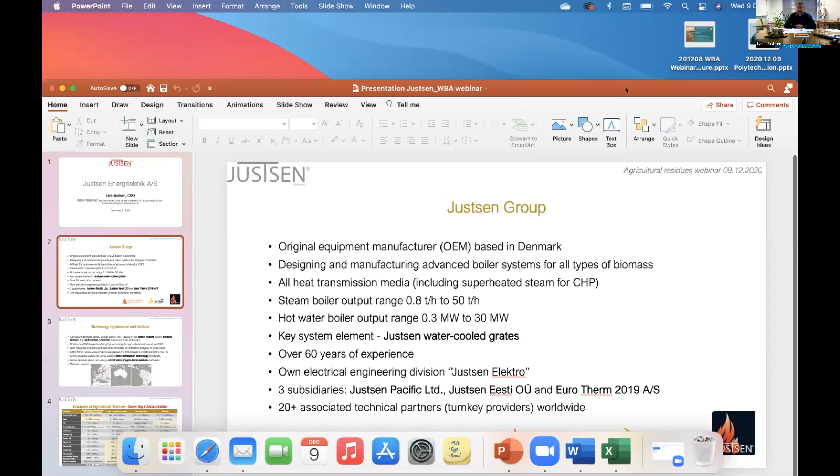We have a lot to cover. I have 8 to 10 minutes, so I will jump straight in. I won't spend so much time on doing the presentation of the company, people can read that in the slides. We have an agreement that when I raise my hand, I would like to change the slides. So please go ahead.

Justsen is a group of companies over the world. We are a so-called original equipment manufacturer, OEM, based in Denmark. We have, as you rightly say, 30 years of experience with large boiler plants, but in total we have more than 60 years experience with biomass boiler plants. We celebrated our 60 years anniversary last year together with technical partners from all over the world. We are working as an OEM, but through these technical partners and our own 3 subsidiaries in Australia, Estonia, and Denmark, we can offer turnkey solutions to end users worldwide. Please switch to the next one. Here we have a slide showing where we are represented at the moment.

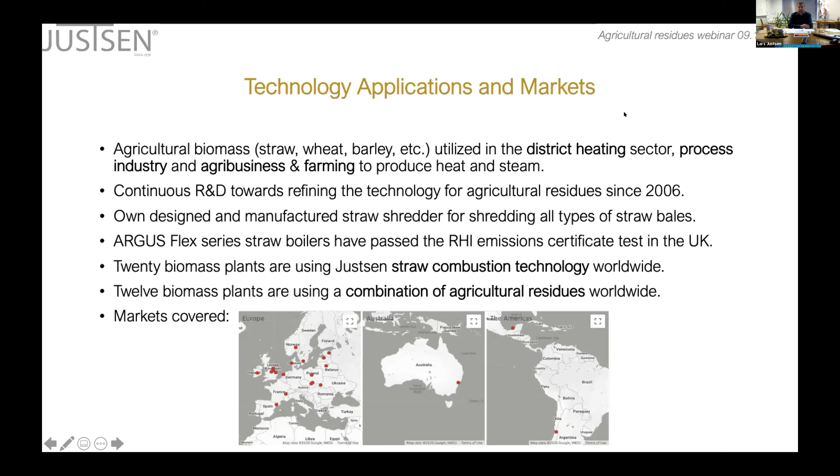We have three slides and we have decided to provide an overview of the characteristics of some representative agricultural residues, compared with wood chips from virgin wood to see where the agricultural residues mainly differ. On the next slides we will show some of the challenges, and then some of the solutions that biomass boiler providers use when combusting agricultural residues.

First, the key characteristics. There are four columns on this slide. The first shows virgin wood biomass, and what's marked in yellow is the challenge we see. The good thing about wood is that carbon, hydrogen, and oxygen together make up about 99% of the dry matter in that biomass, so it's very easy to handle. I'm not going to talk about wood, it's there for comparative purposes. Instead, I'm going to talk about straw, crude olive cake, and rice husk.

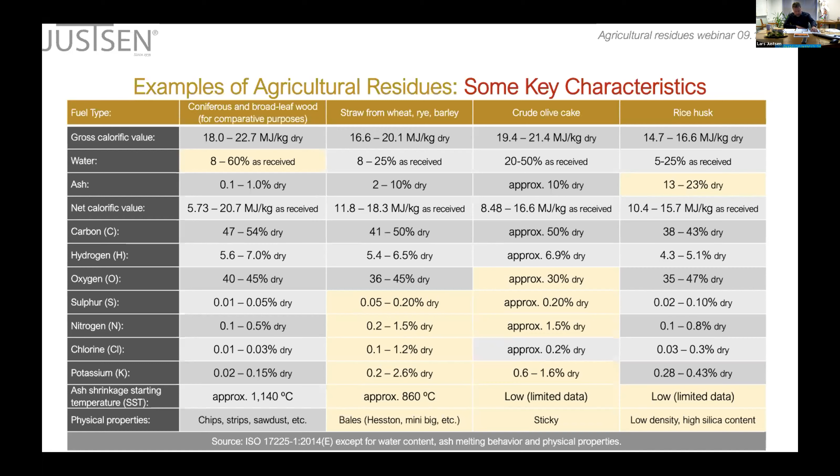So I'm ready for the next slide to go more into detail with the challenges. Here you can see the fields marked in yellow on the previous slide, and we explain a little bit what the challenges are. Let's forget about wood for now and focus on the agricultural residues.

With straw, the medium to high sulfur content results in SOx emissions, but also corrosion issues inside the boiler. Nitrogen is also quite high, although not as high as contaminated wood wastes like chipboard and MDF. It has, as the only one of these, a high chlorine content, which results in hydrogen chloride and dioxin emissions, and also corrosion issues.

That is true for many agricultural residues. It's high in potassium, which is used as a fertilizer, and when combusting, a percentage of that potassium becomes K2O, which is quite sticky at low temperatures. That creates fouling issues inside the boilers. Straw also has a low ash melting point, so there can be slagging and clinkering on the grate, which again creates some fouling issues.

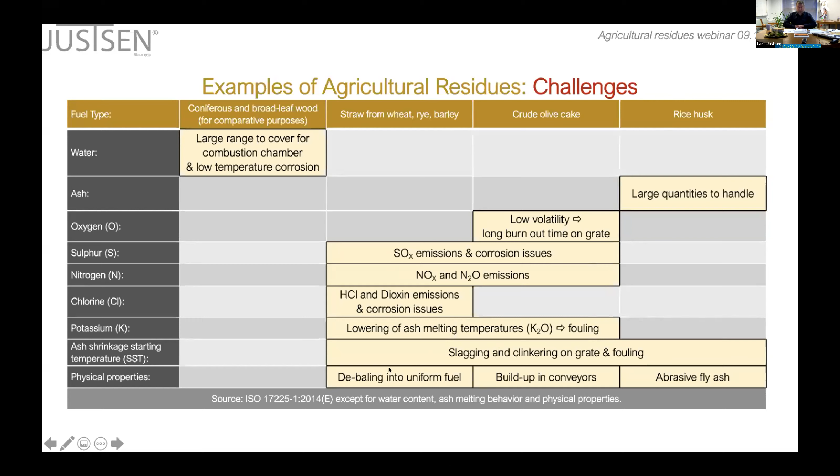Let's move on to the solutions.

If we, instead of going by fuel, go by the rows, we'll start with ash. The ash content of straw and crude olive cake is quite high compared to wood at least, but for rice husk it's extremely high, and that's why you need special conveyor systems. A fifth of what goes into the boiler comes out as ash because of this high silica content. When it comes to the low volatility of the olive cake, you need this rectangular grate.

When it comes to sulfur emissions, sometimes lime injections are used. Around the world there are different levels of SOx emission allowed. On the EU directive that came out in 2014, a limit was set for 300 milligrams and 200 milligrams, depending on the size of the boiler. And that is marginal for sulfur dioxide emissions, so in some cases you would need to use lime injections. I will get back to that on my last slide.

The nitrogen content results in NOx emissions, as we saw, and there are different ways of controlling that. First of all, you need to avoid creating the nitrogen oxides. When it comes to biomass, all the nitrogen in the flue gases will come from the nitrogen in the fuel and not the nitrogen in the air. So it is fuel-derived NOx that we are looking at most. Good boiler design with staging of the combustion air can ensure that you are not creating a lot of it, but you can also employ, depending on your construction, SNCR or SCR systems to inject urea or ammonia into the flue gas stream and keep the level down.

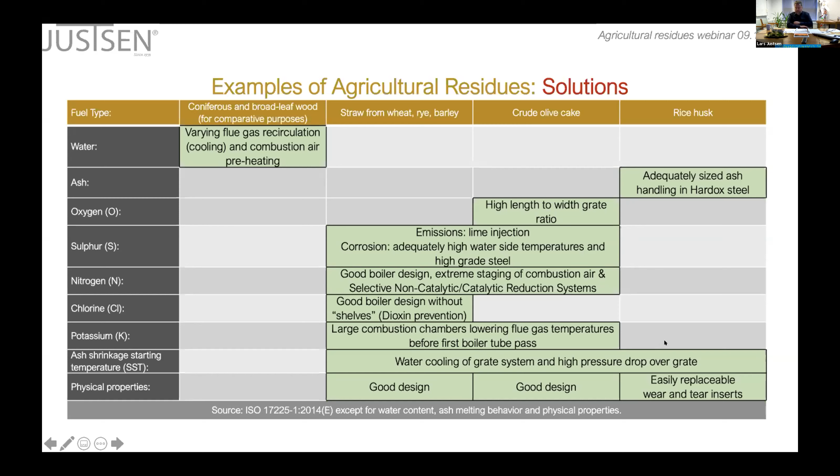I'm ready for the next slide and I will try and speed up.

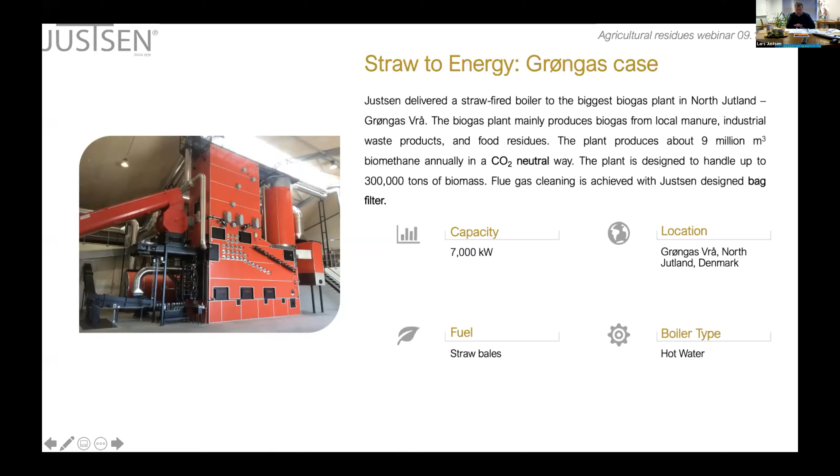Quickly going through this slide, Grøngas is a customer of ours in Denmark. It's built as a straw combustion plant and has been in operation for 3 years. The straw harvest in Denmark 3 years ago was not of a quality good enough as fuel. Therefore, they actually switched there to crude olive cake on that boiler, and we have learned a lot from that to deal with the high sulfur and with the stickiness of this fuel. And I'm ready to move on to the last slide.

This is a newly developed boiler system that we have made, and you can see on the slide here that we have employed some of the things I've been talking about earlier. First of all, you have the water-cooled grate that is fully integrated with the rest of the water system inside the boiler. In the ignition zone, we have stainless steel reinforcements to make sure that the activated chlorides and sulfur

is not going to cause corrosion. We have vertical passes, and on the third pass marked there, it's a chamber for employing an SNCR system because it needs the right temperature window in order to reduce the NOx emissions. Then where it's pink all the way through inside the pressure drum, we have empty passes with good space. We have discharge augers, so we don't have fly ash lying on shelves inside the boiler to prevent dioxin creation.

Then it goes through the pressure drum and through the economizer, which would be modulating. And when it's modulating, we can actually control the flue gas temperature to hit the sweet spot of the lime injection after the boiler system and before the bag filter.

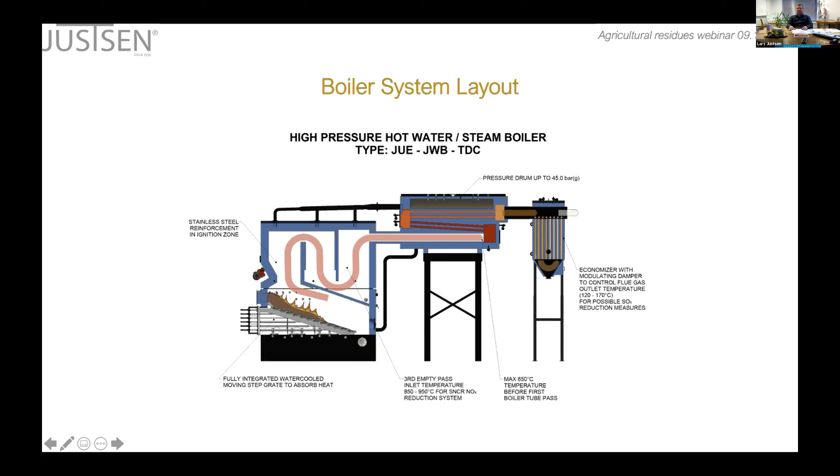Thank you very much, Lars. That was very good to start with, so that you gave kind of a generic view on the issues and the challenges, and I think that was very useful for the rest of our presenters who will not need to go into these generic issues. And now I'm very happy to introduce Hong Hao to you. Hong has been the vice president of World Bioenergy Association, and he is also the chairman of Great Resources New Energy, a company that is realizing a significant number of projects using agricultural residues as fuel in China. Hong Hao, the floor is yours.

Okay, thank you. Things we all know. By September 22, our President Xi announced that China has a target that by the year 2030 we will reach peak emission, and by the year 2060 we will reach carbon neutral.

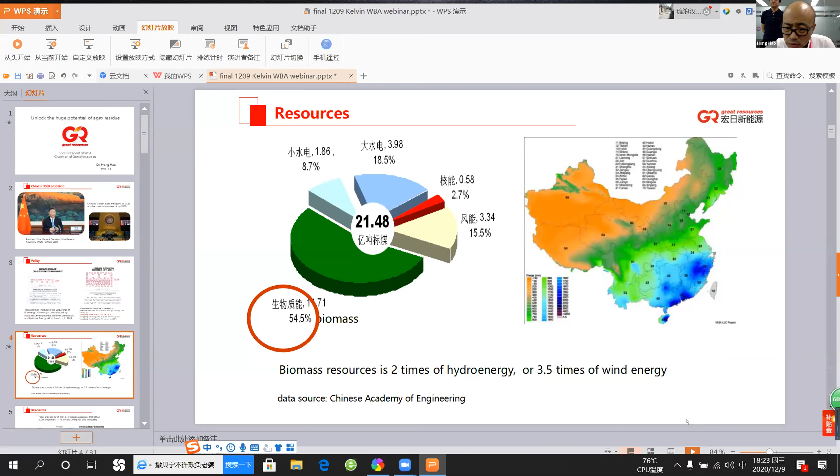Sorry, how would you like to share your screen with us? Yes. Okay, very good. Okay, yes, just do the full screen mode, and then we're good to go.

Okay, thank you. This is the resources we have in biomass energy. Our biomass resources are as much as 2 times compared with hydroenergy, and also 3.5 times wind energy. That means our biomass energy is the number one renewable energy resource.

And the important issue is, look at the right: our biomass energy is located on the eastern side of China, where 75% of people live, as compared with solar and wind energy, which is located on the western side, where only 25% of people live. So biomass energy resources align with our energy consumption.

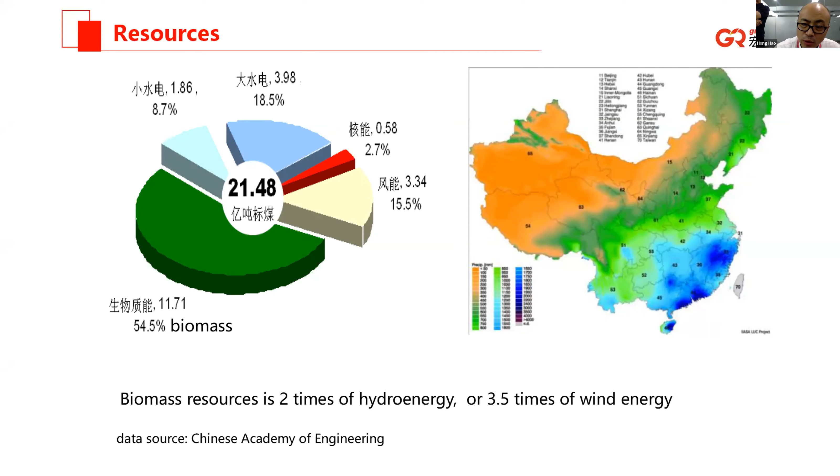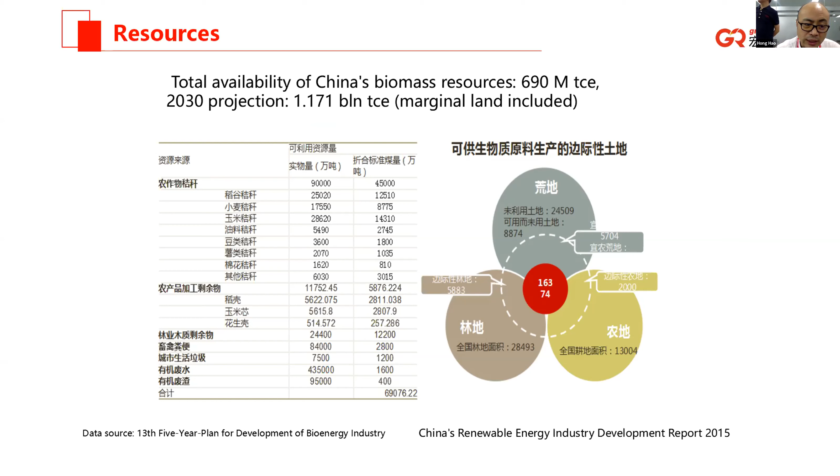And we also have enough biomass resources, including forest residues, agricultural residues, and other organic resources. This is the forest residues we have in whole China, and this is the different kinds of agricultural resources in whole China.

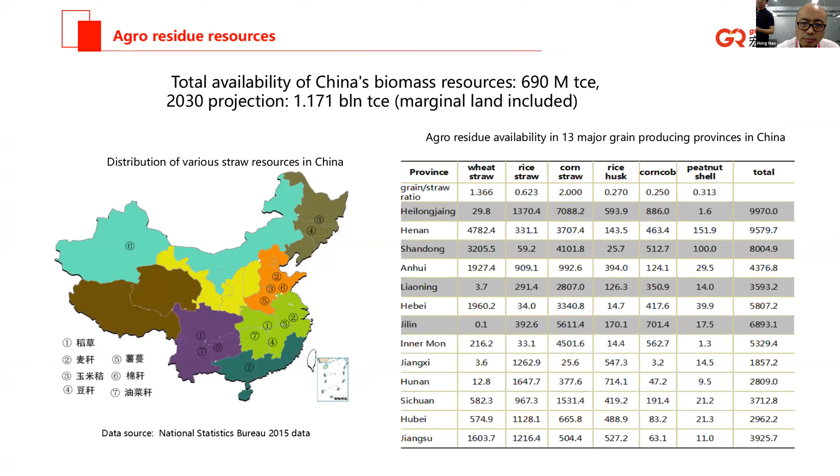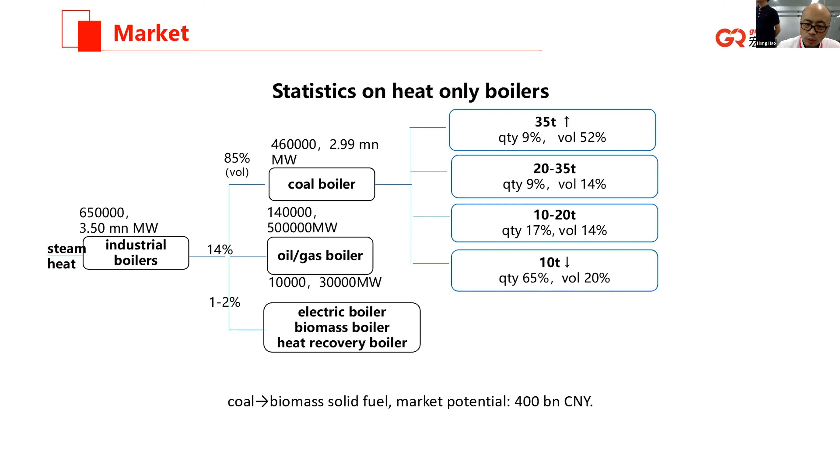And this is the market: we have 650,000 boilers in whole China to produce heat, and right now 85% of these boilers still are coal boilers that use coal. Only 1 to 2% of the boilers are based on biomass. So we still have a lot of potential market.

As we're talking about the market, first we need to analyze the industries that use heating. Number one is chemical in China; the chemical industry uses as much as 34% of the heating in whole China.

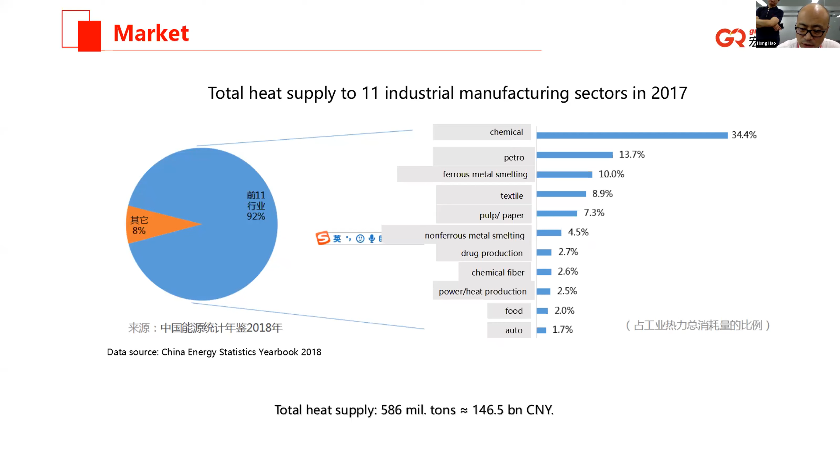Number two is petroleum. As we calculated this, I think this figure could not capture the whole China energy consumption of heating, but some of them amount to as much as 586 million tons of coal equivalent, that is 146 billion yuan every year. So this market is big enough.

And this is industry heating. Another heating market is urbanization. In China, we have more than 1% urbanization growth every year for the past 10 years, so building heating demand is very high.

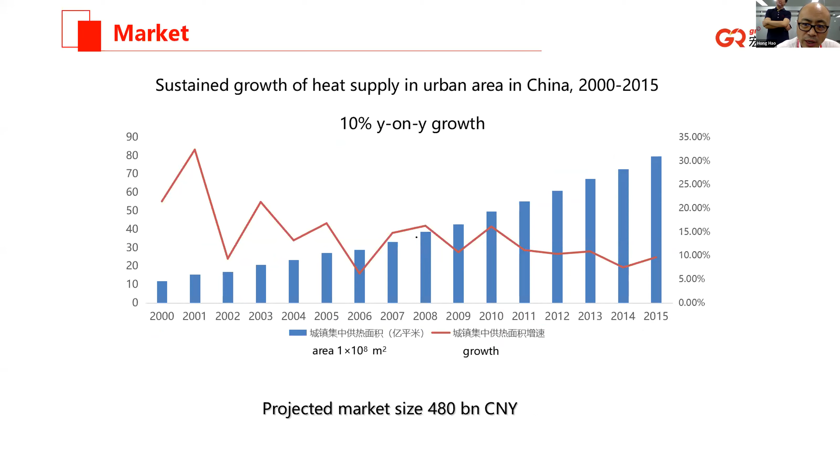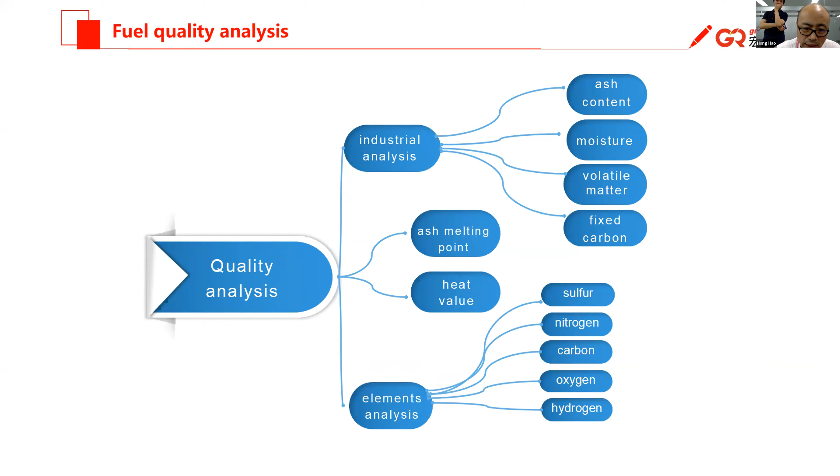As we analyze, first we have to think about the quality analysis when talking about using biomass energy. That includes industrial analysis, ash melt, heat value, and element analysis. And we have set up a quality analysis laboratory 5 years before.

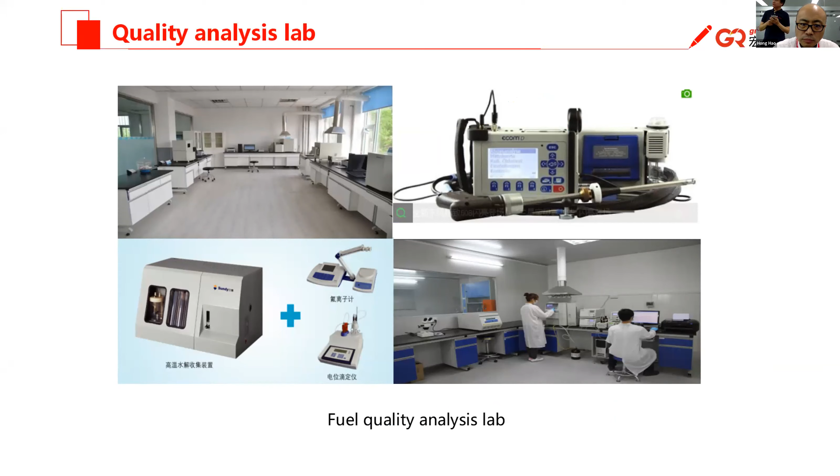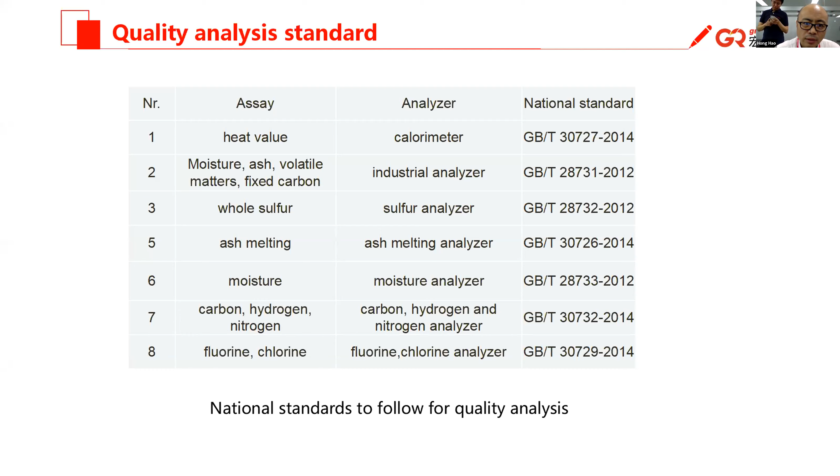We also have some standard national standards to do the quality analysis. This is the result when we're talking about the pellets, including wood pellets and straw pellets, especially corn straw pellets, and also rice husk and peanut shell pellets. These are the top 5 we use in Northeast China.

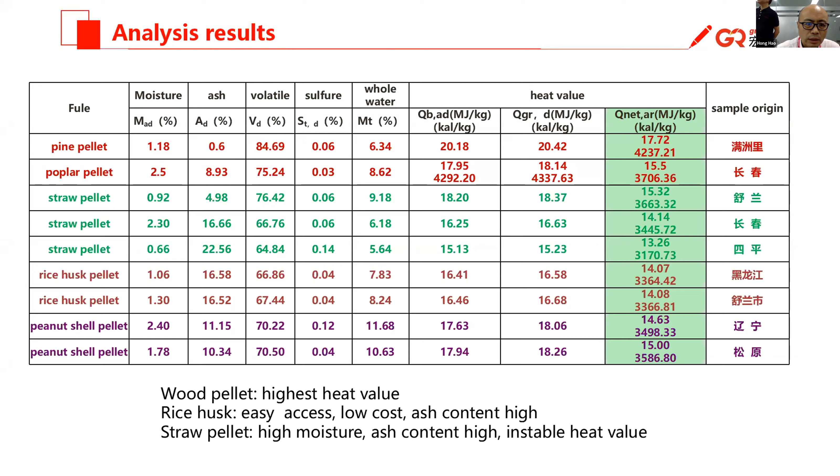These are the chemical elements of agricultural residues. And these are 3 challenges: one is fouling, another is slagging, the third is corrosion. So when we're talking about agricultural residues, when we use them, we have to face these 3 challenges.

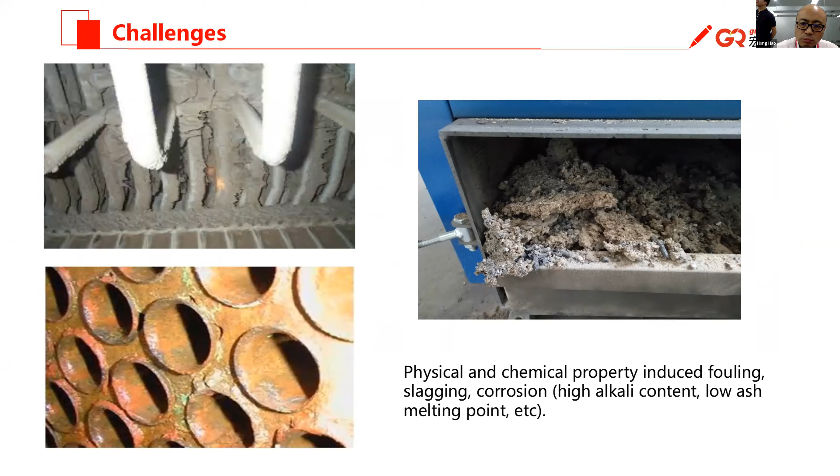Another challenge is the cost. Based on our experience, straw pellets are nearly equal to coal consumption cost-wise. Wood pellets are a little bit higher compared with straw pellets. That's the reason we are trying to use agricultural waste to make pellets, because that's the cheapest choice for us.

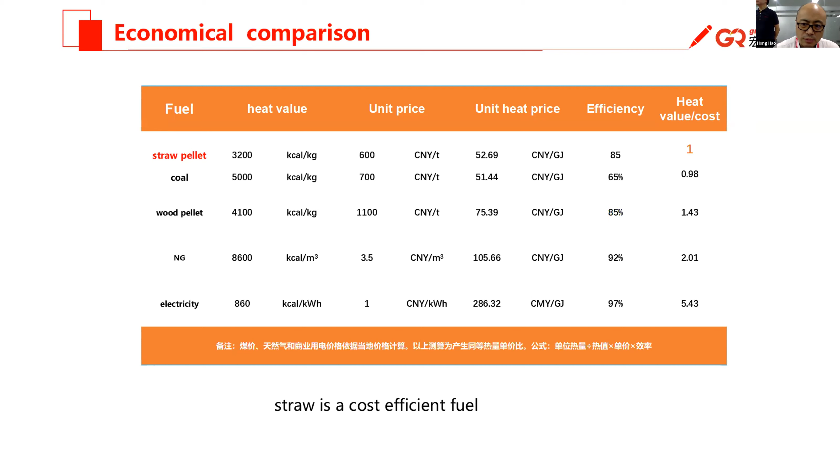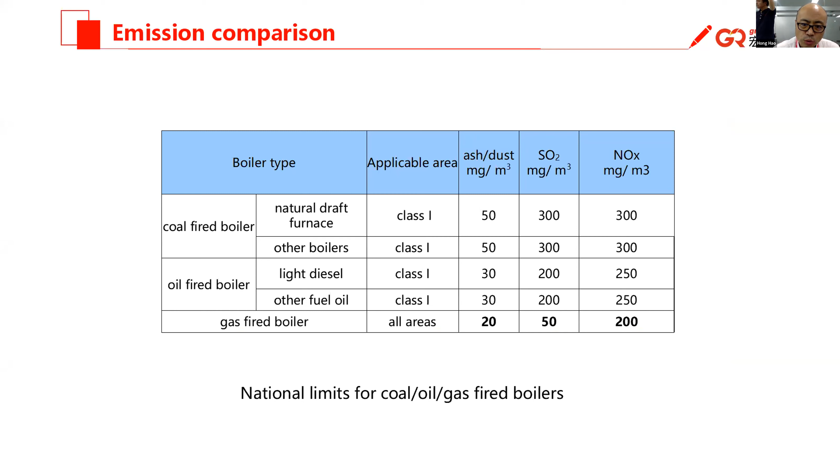And the emission - there are 3 types: coal-fired boiler, oil-fired boiler, and gas-fired boiler. We have to compare our biomass boiler to meet the emission demand. Right now we don't have a national emission standard in whole China, but in some provinces, for example Jilin province, we have our own standard of emission for biomass boilers.

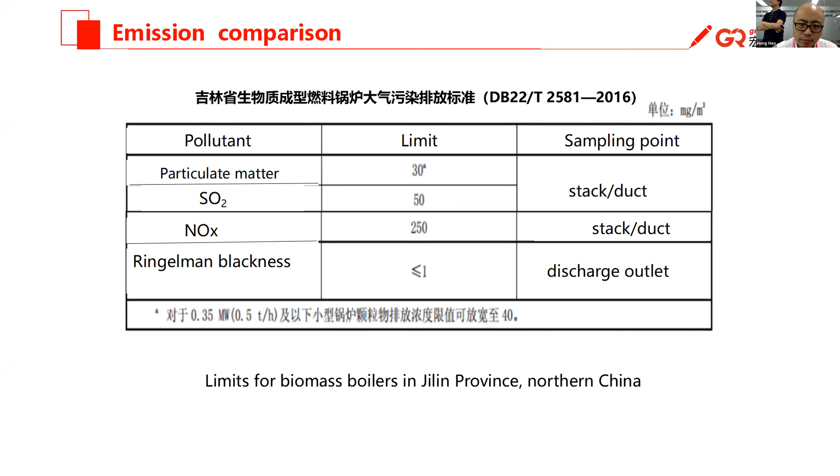During the past 15 years, since we set up grid resources by year 2006, we have set up a value chain from resources to plant service. And this is our business model.

One is BOO. That means we invest in a heating plant to supply heat to our customers, and we buy pellets from the resource owners, and we give our technology to make pellets, and we use their pellets for heating supply to our customers.

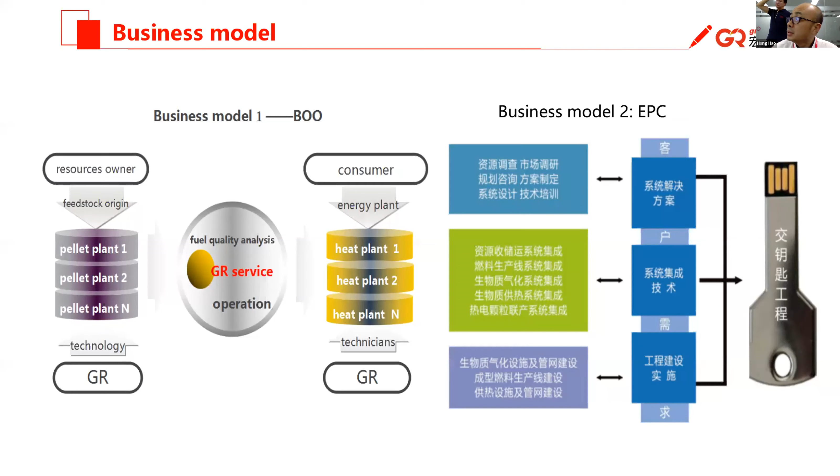Another business model is EPC, where we do everything to service our company. And now we have so many customers, and at least five of them are top 500 enterprises of the world.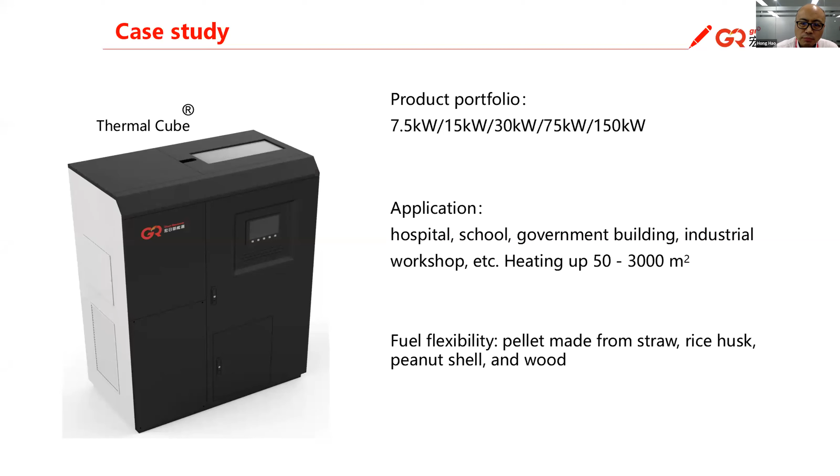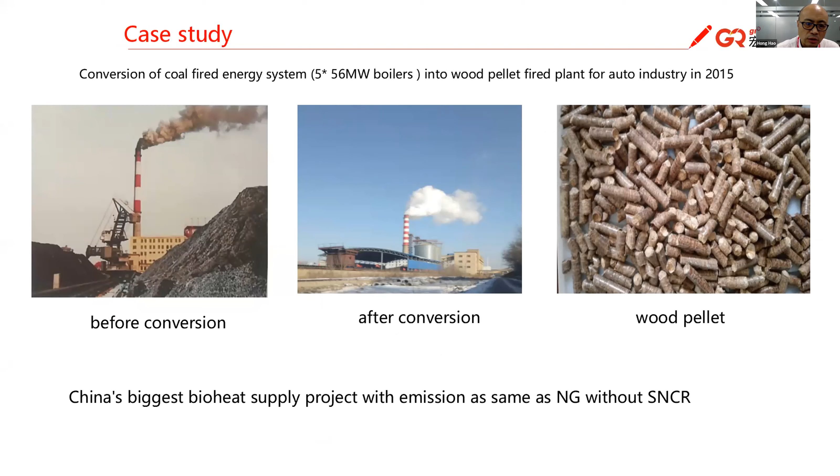And this is the biggest plant that we have already used. Each boiler is 56 megawatts, and we have transferred 5 of these boilers from coal fire to pellet fire, and it's running from year 2015 to now.

This is another case study, where we use rice husk pellets starting from year 2017. That is a university zone where we supply heat to 10 universities, as much as 1.2 million square meters.

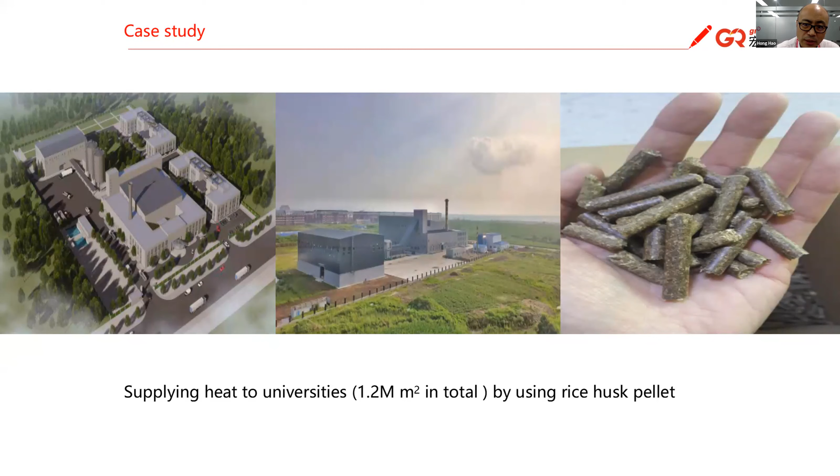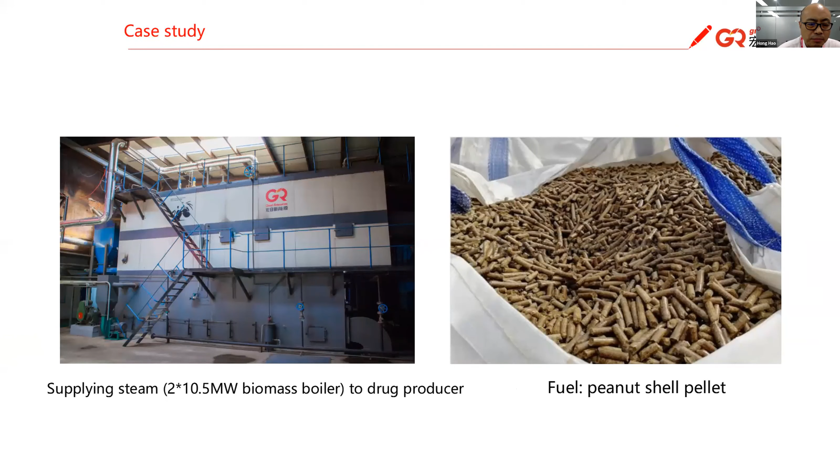And this is another case where we use peanut shell pellets to supply bio-steam to our customers.

And this is a CHP plant where we use corn straw directly to produce heat, to produce electricity, and to produce fertilizers as well.

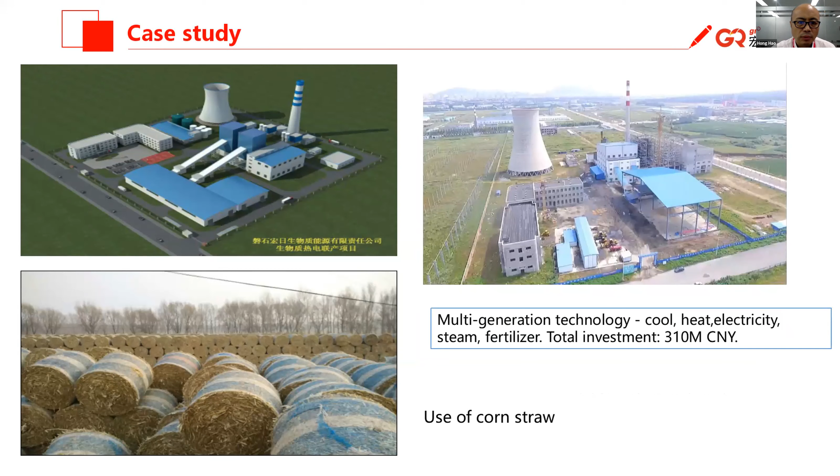And this is another case that just finished early this year. It used wood chips to produce steam.

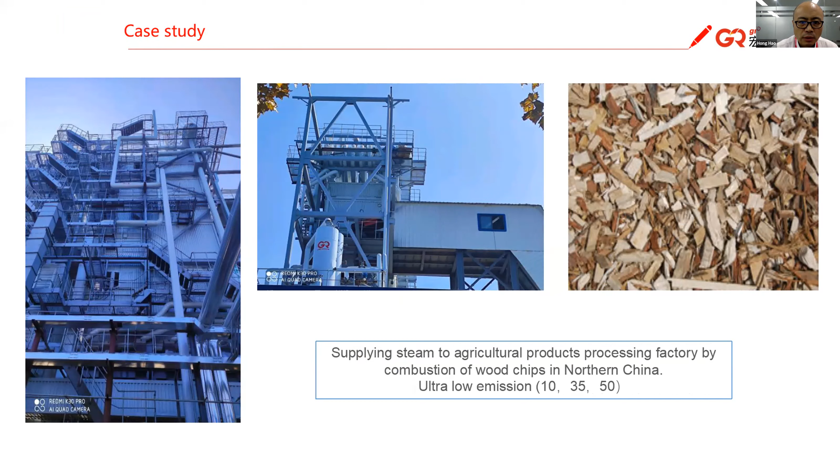And this is another case where we use briquettes of corn straw, also using hot air to dry the corn. That means we use the straw of corn to dry the corn.

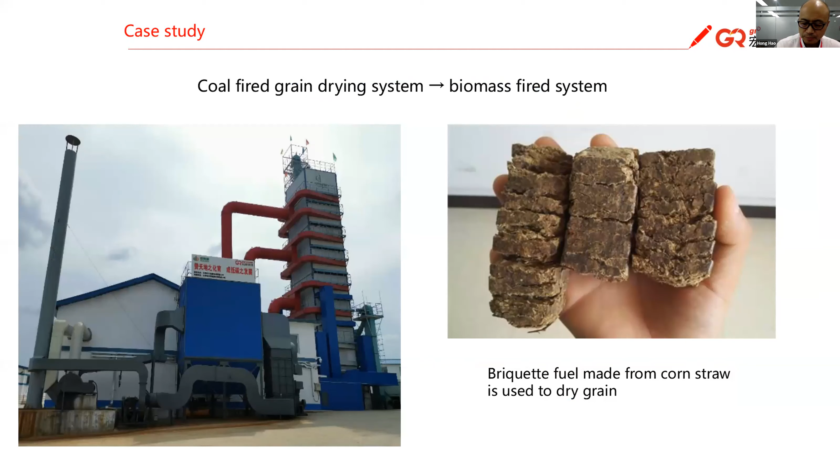So now we have our plan to try to use bioheating to supply carbon neutral towns, carbon neutral industry zones, carbon neutral cities. This is our target. But right now we are trying to use any advanced technology to reach that target, not just in Jilin province, but in the whole of China.

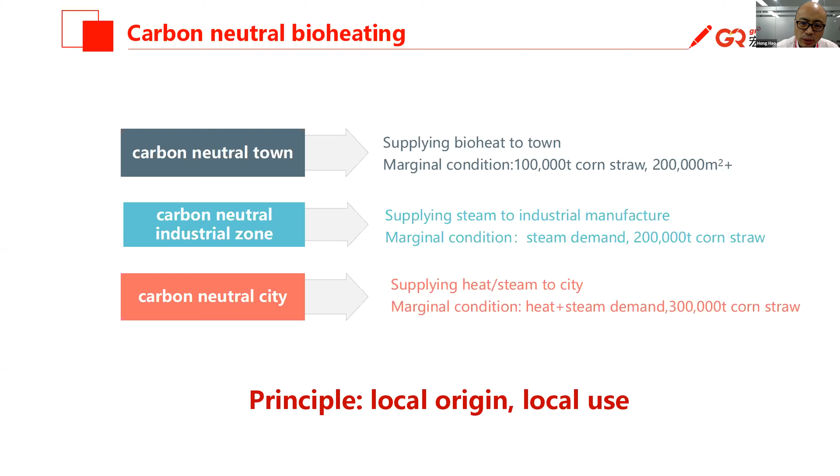This is the year we are trying to do the planning for the next 5 years, and we want to use most of our resources based on agricultural residues, because in China, the #1 resource should be agricultural resource. And based on our more than 10 years of experience, we can use it smoothly. So that is my report. Thank you very much.

Thank you very much, Hong Hao. This was really amazing what you're accomplishing, and the way that you're growing the use of agricultural residues.

There has been a question in the audience, a question that I also had - initially I was really surprised to hear you mentioning that using pellets from straw are actually competitive with coal. The question from the audience, from Jean-Marc Jossart from Bioenergy Europe, was: would it be straw from wheat or from corn?

From corn, not wheat, because in Northeast China we only have corn. But I think for wheat that should be similar.

Is it indeed possible to realize a conversion from coal to pellets without a subsidy, or what would be the incentive? What would be the incentive for a coal-fired boiler to be converted? How are policymakers going to introduce this change from coal to agricultural residues?

First, for the policies, a coal boiler could not be used if the capacity is lower than 14 megawatt. So every coal boiler with a capacity lower than that should be shut down. So that's the chance for us to do this.

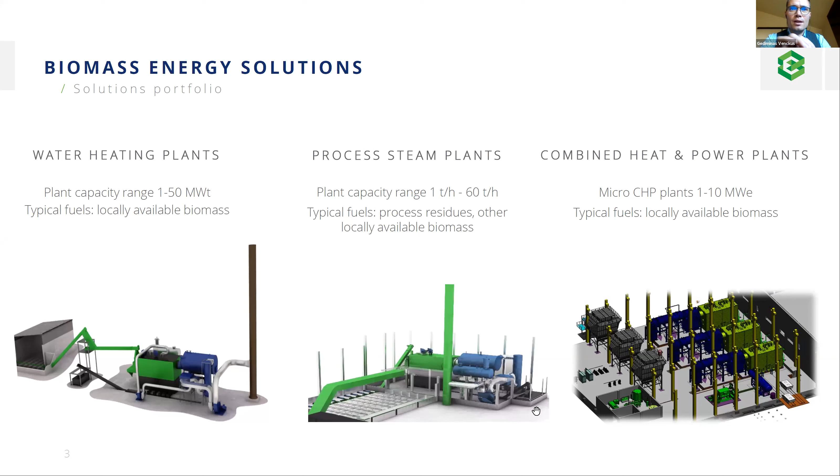Just to illustrate a couple of examples of our projects - I'm not going into very deep technical detail here, primarily because of confidentiality restrictions we have from the customer side. They do enjoy those investments and it brings certain competitive advantage, so in many cases, unfortunately, we're not allowed to disclose the types of solutions and what has been implemented. But this gives you a very broad overview and examples of what kind of industries are running our plants.

However, there are some challenges with getting rid of that material. So what happens here is they burn it and produce process steam. The flow of biomass, however, in this plant is not enough to fully cover the steam demand of the plant, so they mix in some waste wood also to complement the availability of biomass needed for steam supply.

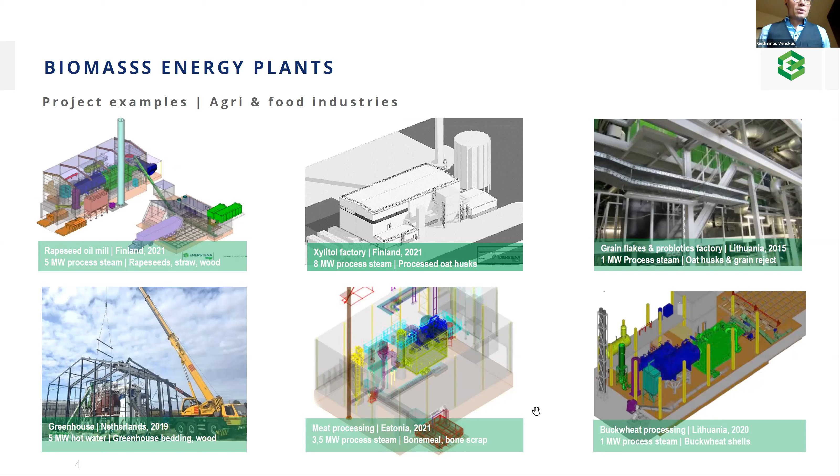Now about the potential that agri-biomass residues bring to the stakeholders. There's absolutely untapped potential, huge potential of agricultural fuels, and we believe it very much. The key message from a technical perspective is that yes, the technology is there - the industry has technology solutions for all of those fuels. What we'd like to see is more encouragement from those stakeholders to move forward in that direction. By doing this, they will recognize a handful of values - biomass waste to energy enables several valuable aspects: energy independence. If you can disconnect from your gas pipeline, coal, or heavy fuel oil, and produce your energy from your own side streams, this is really wonderful. In terms of supply and cost, you become independent, your product becomes more competitive, and you get a sustainable business.

You're no longer dependent on imported fuels, right? There is circular economy also in play, a very popular term frequently used. If you manage to use it in the right way, marketing-wise, and position yourself, there is added value that comes.

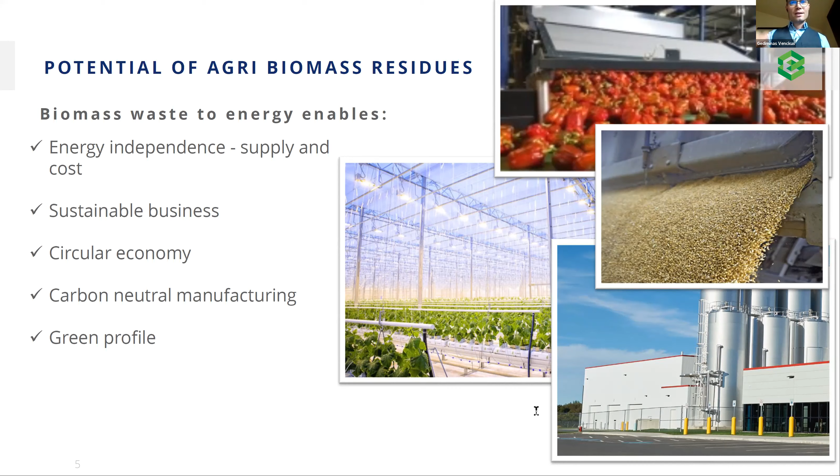On technology, I will perhaps not deep dive. Lars gave a very good insight there. I couldn't agree more on the solutions and challenges we see with agricultural biomass. But the message to round up is very prompt and clear: we have the solutions. The solutions are there. Thank you very much, Gediminas.

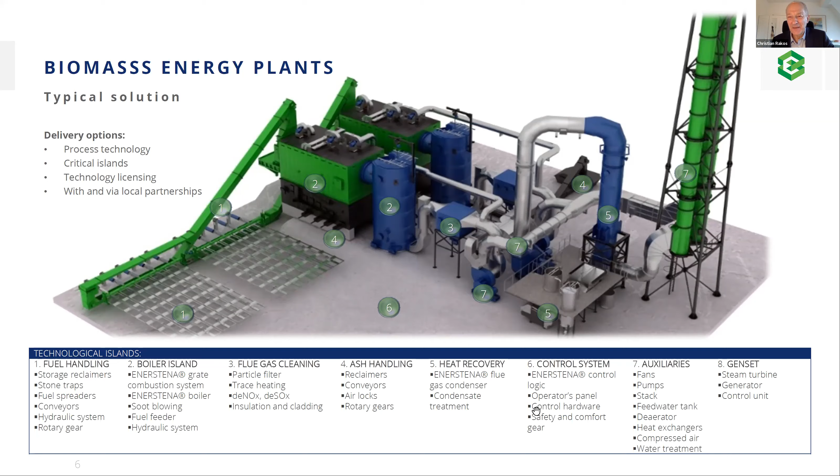And the next poll really relates to what Gediminas has been saying. It relates to the question, what are the barriers that keep us from doing this, as it makes so much sense and as the technology is seemingly available for the most different tasks of using bioenergy from all kinds of different sources.

It was really impressive to see, Gediminas, how many completely different types of feedstocks you're actually able to use. So may I ask you, Bharadwaj, to come up with the next poll, please?

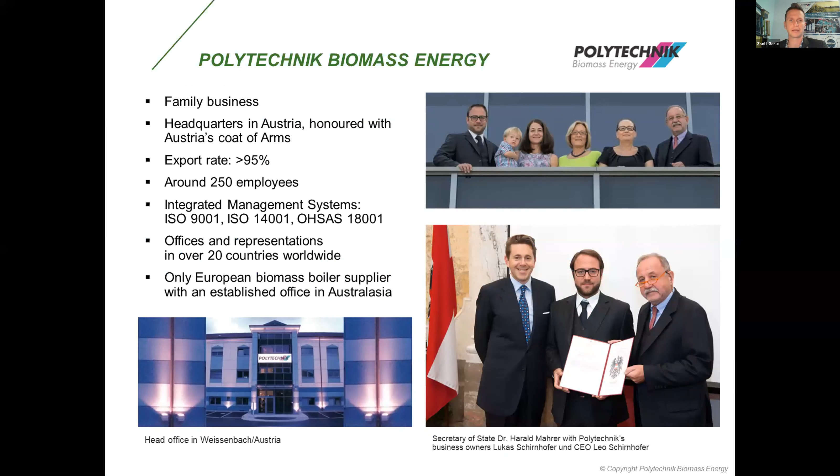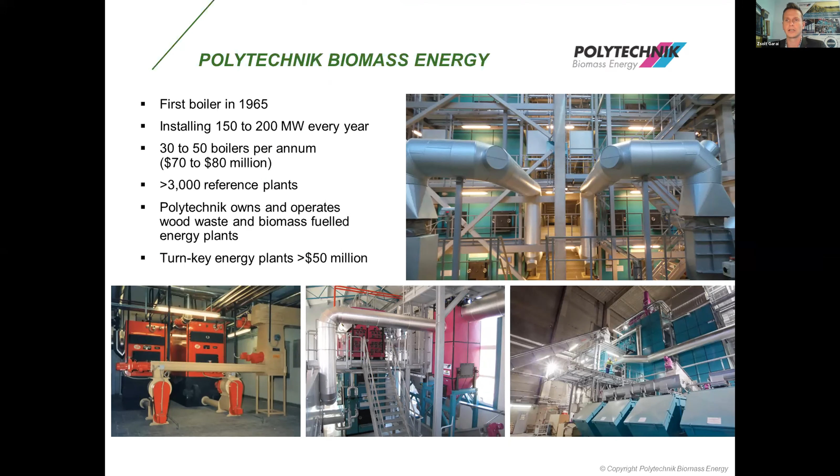I would like to start with a short introduction of our company. We are a family-owned company in Austria with around 250 employees and more than 3,000 references all over the world, from 1965, and our latest project in New Zealand for Christchurch, 15 megawatts. We have also plants in Europe from 1 megawatt, and the range what we can do is from 300 kilowatts to 30,000 kilowatts.

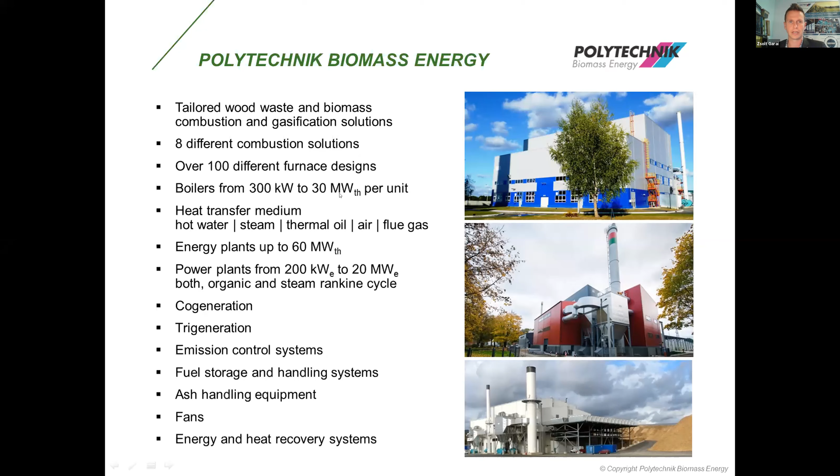You can see some details of the company. We have 8 different combustion solutions, from waste wood to bark and agricultural waste. We have several power plants with electrical production, cogeneration, trigeneration, and turnkey projects also. One of our burning systems is the Poly H.E.L.D., high efficient and low dust combustion.

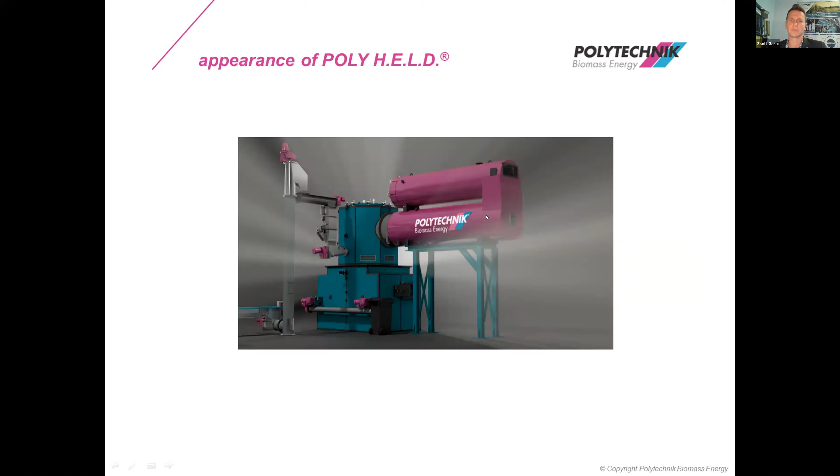This is a gasification system, as you asked in the list. It looks like we have this part is a gasification, and we have a second part with the burning chamber and the boiler.

The function of the system is we have biomass in the gasification system. The upper part is fresh material, wood chips, corn stalk, wheat pellets, sunflower shell pellets, and in the second part we burn this gas from the gasification chamber, the burning chamber.

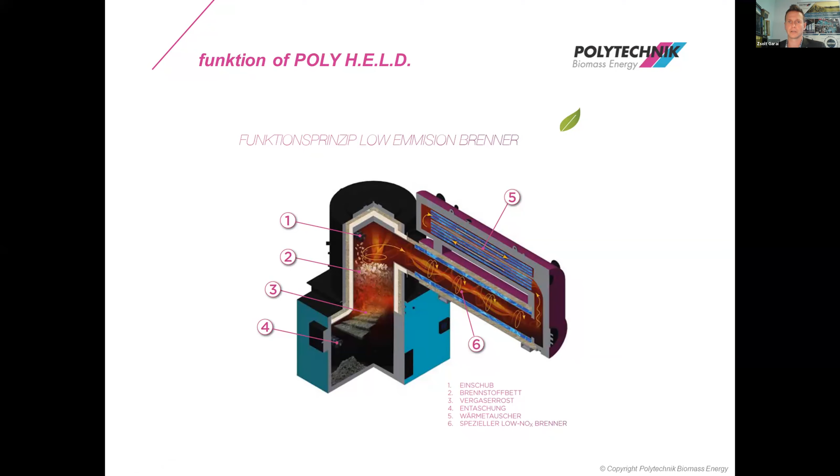That's because we can achieve very low dust emissions. We use the fresh biomass as a filter system, and this burning chamber achieves 5 to 20 milligram dust emission without any other filter system.

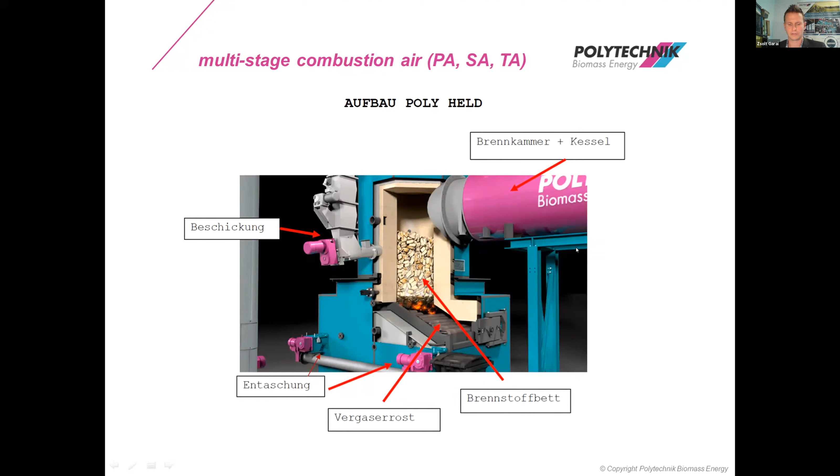You can see how does it work. It's a normal gasification system. At the bottom runs the gasification, and the upper part is the fresh material. We have also a moving grate, and everything is the same as the usual biomass boiler.

What makes it interesting is that we burn the gas and the flue gas, or the biogas, in a second part of the system. That makes it very clean.

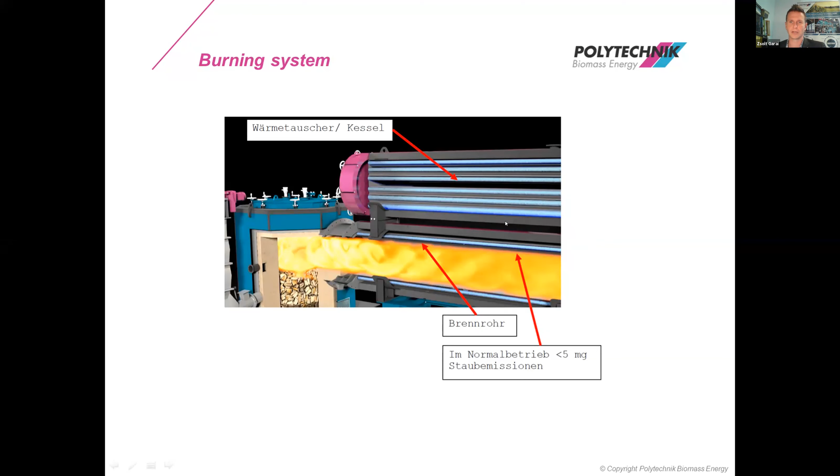Now we have some small ones from 400 to 1,500 kilowatts, but we also have bigger solutions until 30 megawatts. What's very important is this kind of technology can achieve 90-93% efficiency with these low emission limits, what I mentioned earlier.

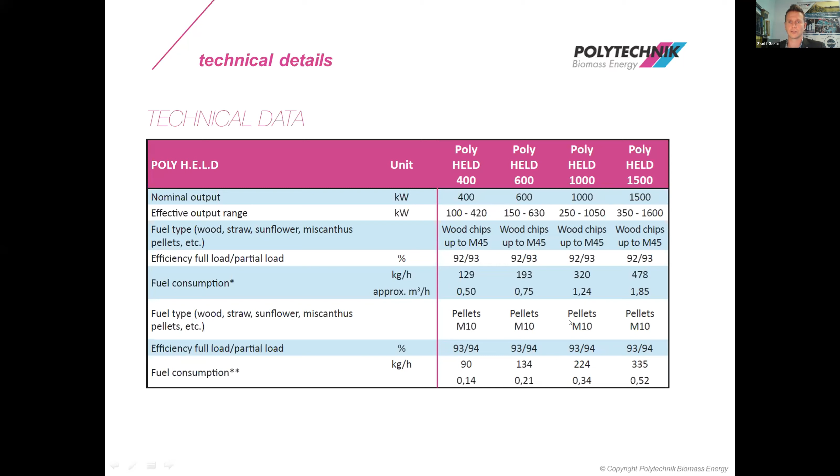Even with pellets, we can achieve 94% efficiency. This is an emission measurement after 2,000 working hours without a cleaning system, lower than 5 milligram after the burning chamber, before the chimney, without a filter.

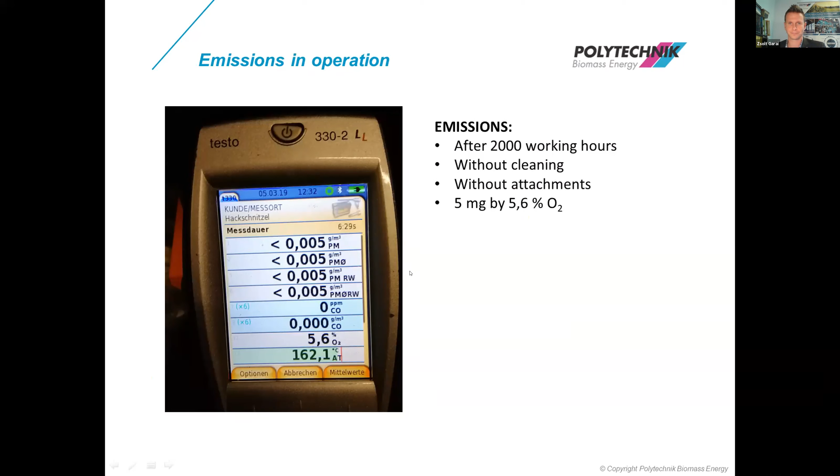We have some references in Austria. The first one is a smaller one with 400 and 600 kilowatt. It's a new technology we started this year. We have 5 references so far.

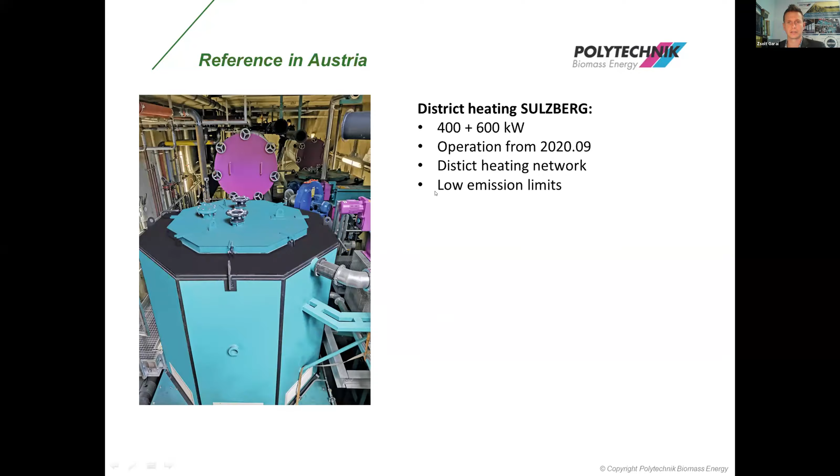Every kind of agri pellets, straw pellets, sunflower, miscanthus. We have very good test results and reference plants with these fuels, and of course wood chips as usual, every kind of wood chips with waste wood or bark or lower quality.

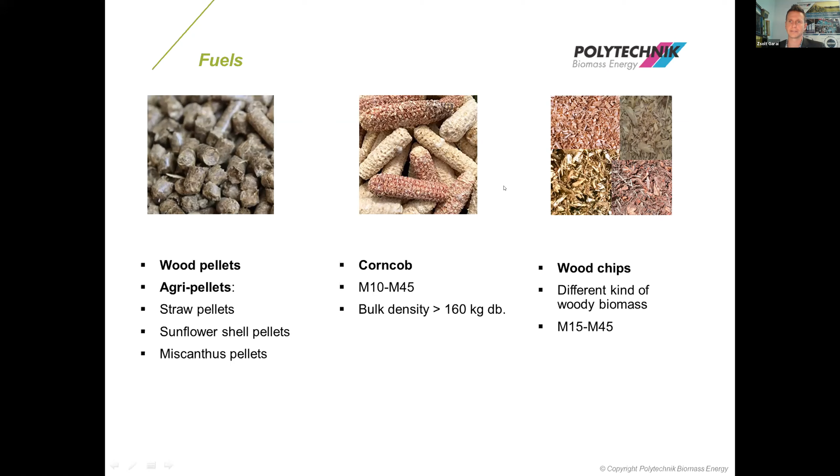We have a little bit different moving grates for straw burning, and the same boiler for warm water, steam, hot water, or even thermal oil. We can use with the system sunflower shells, straw or rice husk.

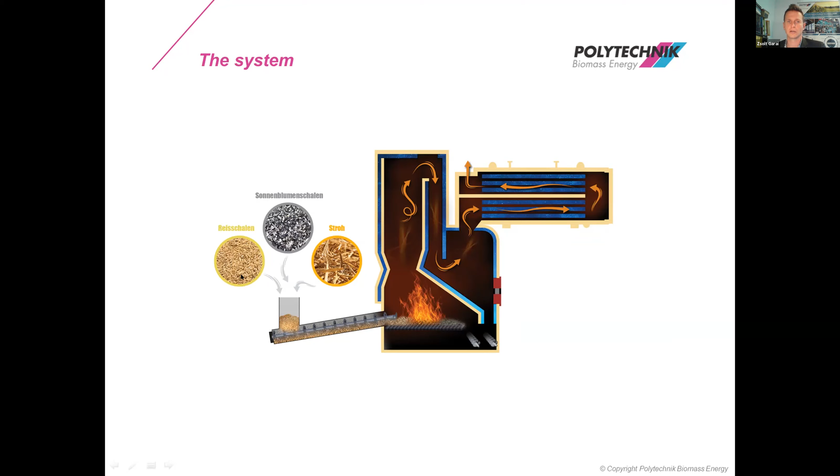This is the normal burning system. There we need a filter, a baghouse filter, for the low emission limits.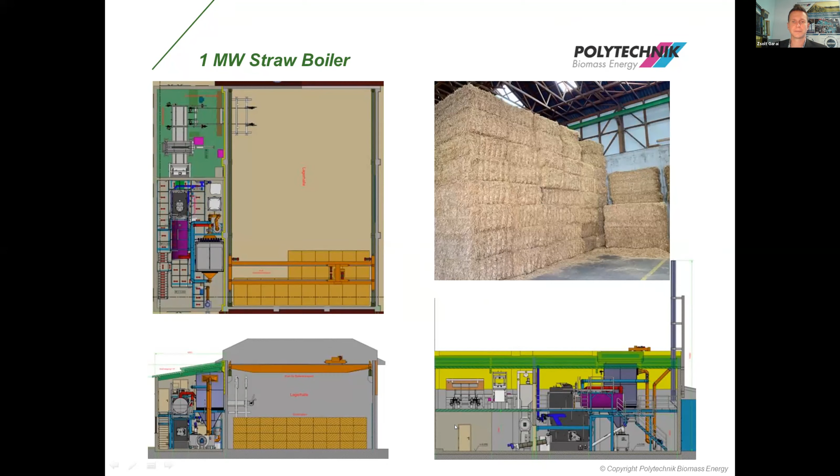There are some pictures from the straw based on the fuel handling system. This is the furnace with this water-cooled walls, and the normal boiler with automatic cleaning system.

There you can see the fuel handling. It's fully automatic. It works fully automatically.

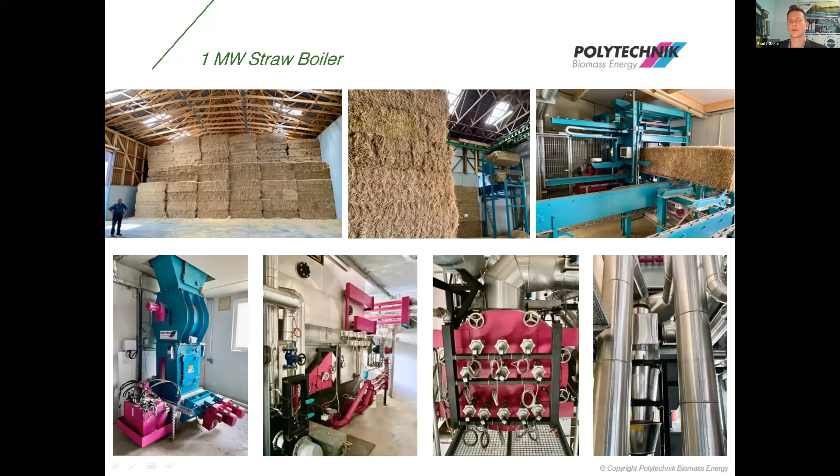Thank you very much, Mr. Garay. I think it's really amazing what you are achieving. I mean, 5 milligrams of dust without any flue gas cleaning, that is a fantastic achievement and shows the strengths of the gasification aspect.

We wanted to immediately burn it and achieve only these low emission limits for warm water, steam, or hot water production. Thank you for that explanation.

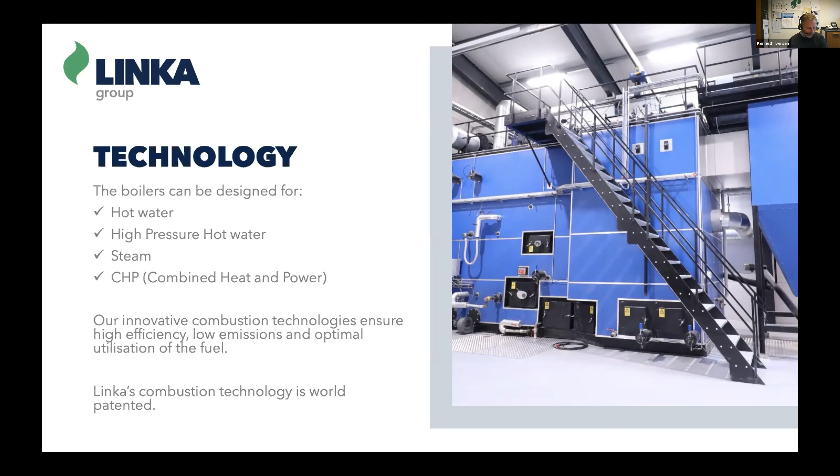Project management is also, as a project, very important. So we customize the solution, we design the solution for our customers, in close collaboration, and again based on their needs and requirements. We use 3D drawing and we calculate budget prices and compile all documentation.

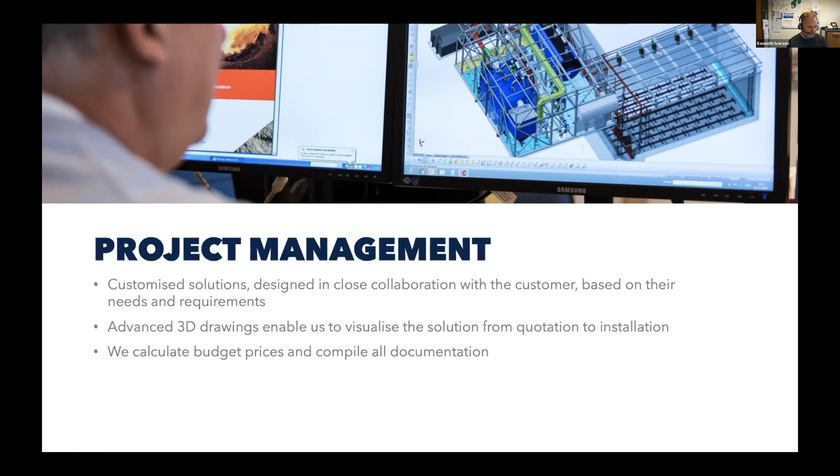I mentioned it earlier, support is very important. We believe it's important that the customer gets support quickly after we have delivered our project. We have an in-house inventory of spare parts for one-day delivery, depending on where it is in the world. We have internet access to all our installed plants all over the world with remote support, so you have availability all the time, and we have support 24/7 all year.

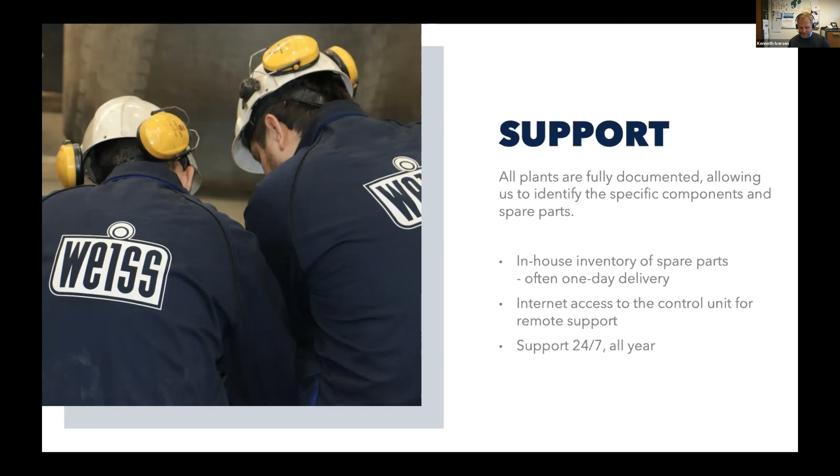Solutions: green energy in Denmark has been a topic for the last 40 years, so the transformation started here in Denmark a long time ago. That's why we're very experienced in designing and installing biomass solutions, especially for agricultural residues. We have boiler sizes from 250 kilowatt to 20 megawatt.

When talking about biomass, we have also learned through experience that fire extinguisher equipment is very important to risk of backfire. All our boilers can be prepared for installation of SNCR, as DENOx, and dust installation, as emissions control is very important for us. This is of course fitted to the plant itself and to the need and regulation of where the customer is located in the world.

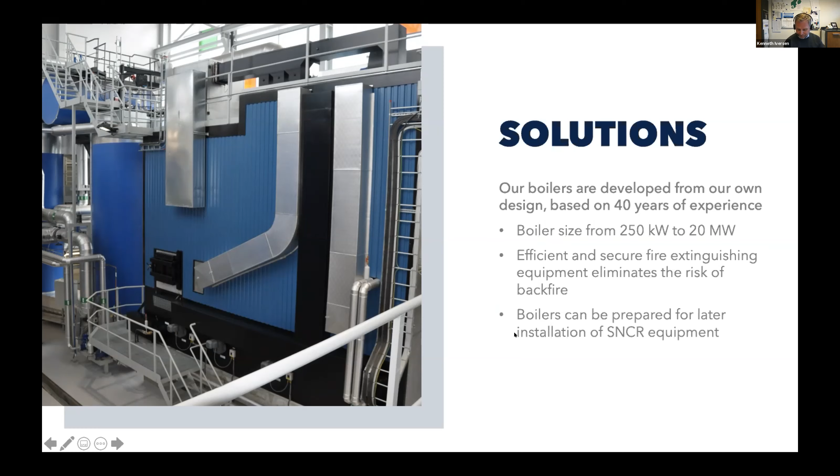We also deliver a mobile solution - you don't have to have a stationary one. If you have a need for a mobile temporary solution, we actually deliver a lot of those installed all over the world, of course also as a turnkey solution.

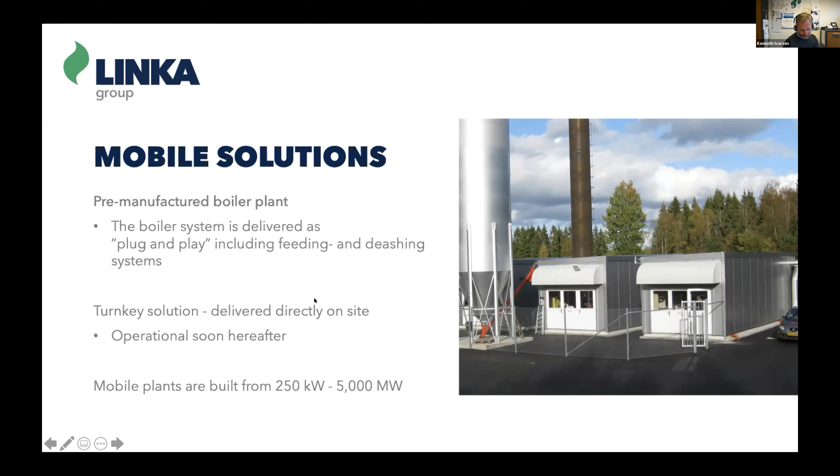I would like to say that straw burning is one of our very experienced fields of fuel, going from 1 megawatt up to 20 megawatt. We have installed a lot of straw installations, mainly in Europe, but also going to the United States at the moment, where the market is developing very fast.

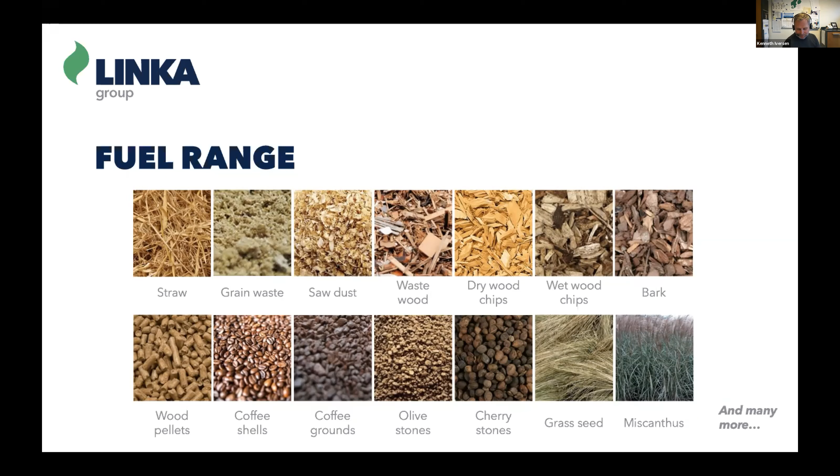And our references, we have just picked an example or two. Skamby here in Denmark, wood chip and grain waste with 91.4% efficiency, and the carbon reduction per year is over 1,000 tons. It's process steam, and it's a 2 megawatt facility.

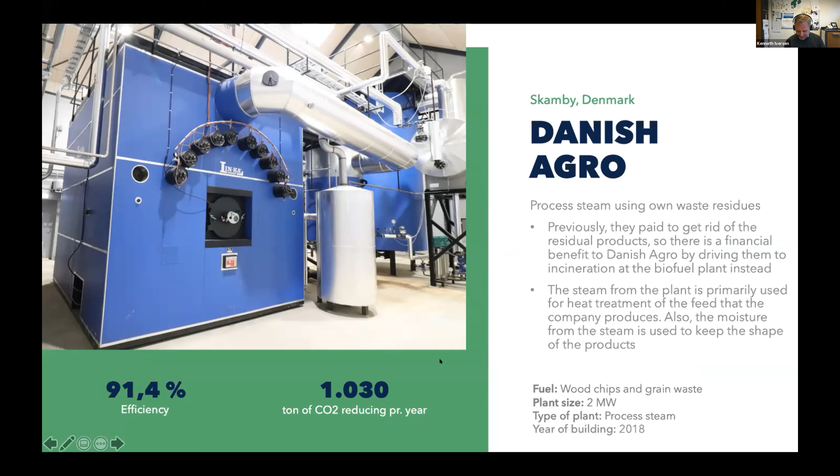We have Hornsyld Købmandsgård. I believe for some of you this is a bit difficult to read, but waste from grain, 2 megawatt, hot water, installed in 2017. The boiler burns 14 tons of waste from grain every day, equal to 5,000 liters of oil saved in that process.

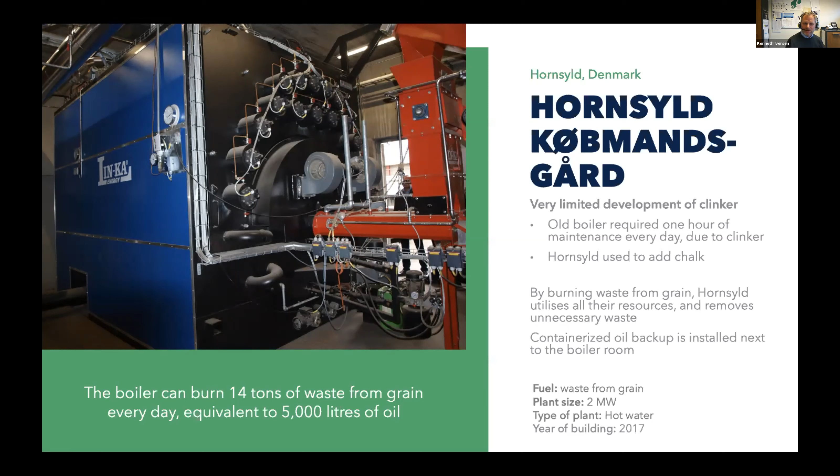At the moment, we are installing this straw-fired biomass plant here in Denmark also. It's a combined plant with a biomass boiler and a heat pump. We see the market for heat pumps here in Denmark and Europe is increasing, so this type of combined energy plant looks like a demand for future installations. We believe the plant will generate 100% carbon neutral heat. With straw it's a circular process: when the straw is growing on the field, it's absorbing carbon. When we burn it, of course, we create carbon, but it's equivalent, and the waste from combustion ash is spread out on the field as fertilizer for the farmers. So there is no actual waste from this process.

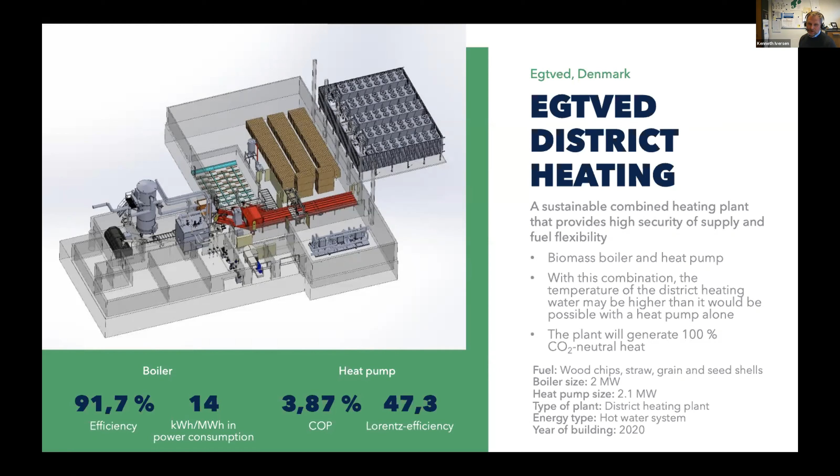In Sønderborg Forsyning, we have an operating 10 megawatt hot water installation providing district heating. It's been set in operation just this year. As we see now, the emission is very low, and there's no DeNOx or SNCR installed on this installation. So it is possible to obtain low emission without any further installation of DeNOx.

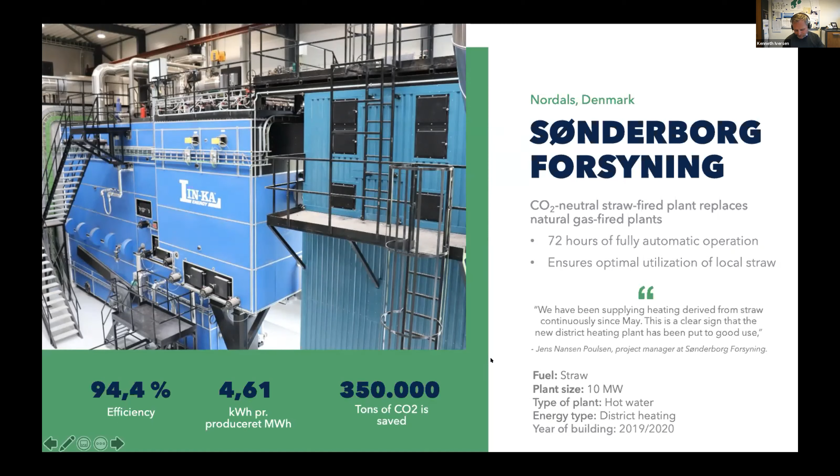And the last installation is in Hungrana in Hungary. We have installed a three-line straw facility with operating temperature of 210 degrees, flue gas temperature of 120 degrees, and they're using this for an operating process, making steam for the factory process. It's very reliable, and the customer is very satisfied with that installation. We are operating this facility at 16 bars of pressure.

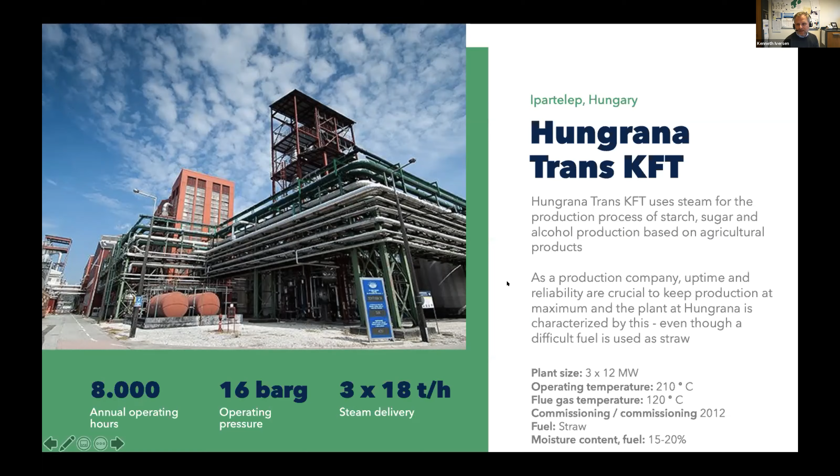Our motto is we are with you all the way. As I mentioned, we would like to see ourselves as a consultancy. We develop together with you and we support you after installation. Thank you.

Thank you very much. That was Kenneth, that was a very nice presentation, and also showed, together with the other presentations, what to me is the main takeaway of this webinar: the solutions are there, not only the technology, but also the service, everything that comes along with offering a real solution. Using agricultural residues as fuel for energy production is a real possibility that exists around the world, relying on very well developed technologies that are extremely clean and extremely efficient. It's just amazing to see what has been achieved over the last decades in technological progress in using this fuel.